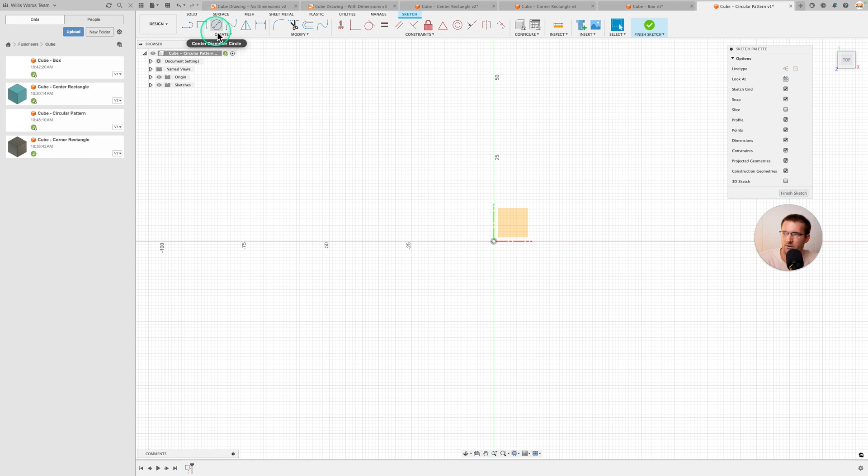The way we would do that, it's the default here. You can also click Create Rectangle, 2-point rectangle. Or what I would recommend is use the R shortcut, so that's what I'm going to do. If you just click R on your keyboard, we can select here, and then we're going to draw it out that way.

So if you're trying to make 1/4 of a cube, you basically want both of these to be a half of a cube, right? And our dimensions for this cube are 1 inch by 1 inch by 1 inch, or 25.4 millimeters cubed.

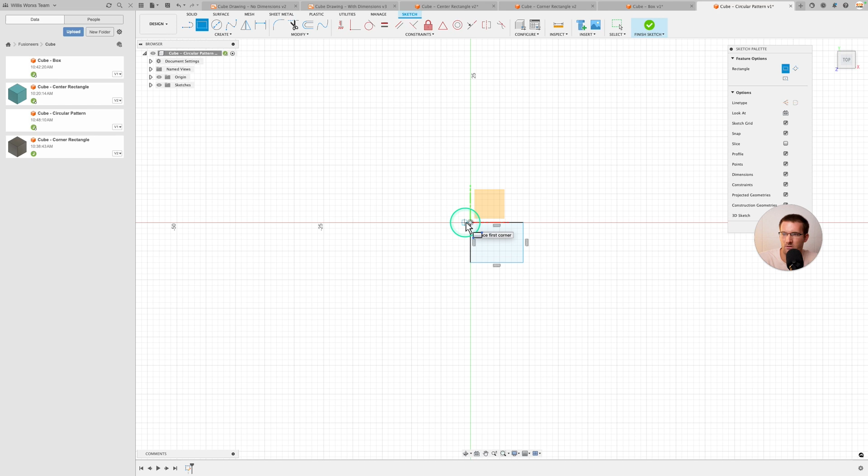So what we're going to do is click Dimension. I'm going to click here, and then I'm going to say 25.4 divided by 2. And then we can do the same thing for this side, 25.4 divided by 2.

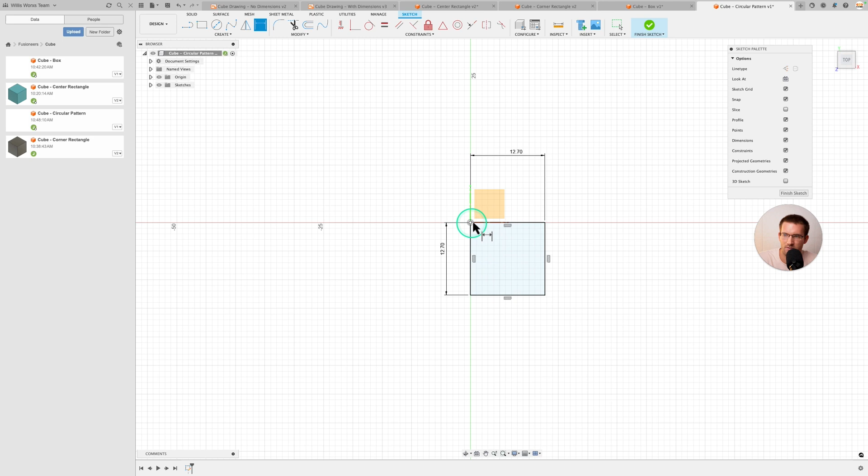And if your rectangle is not black right now, the most likely reason is because you didn't constrain it with the origin. So I'm just going to go back really quickly for those people.

Say I drew my rectangle over here, and then we did the same thing. We said 25.4 divided by 2, and then I'm going to use the shortcut where I say dimension. I'm just going to make this equal to that. So it's the same thing I just did, just a little bit different way.

And you'll see here it's still blue. So if I click Escape, I can move this around. And we want it to be fixed.

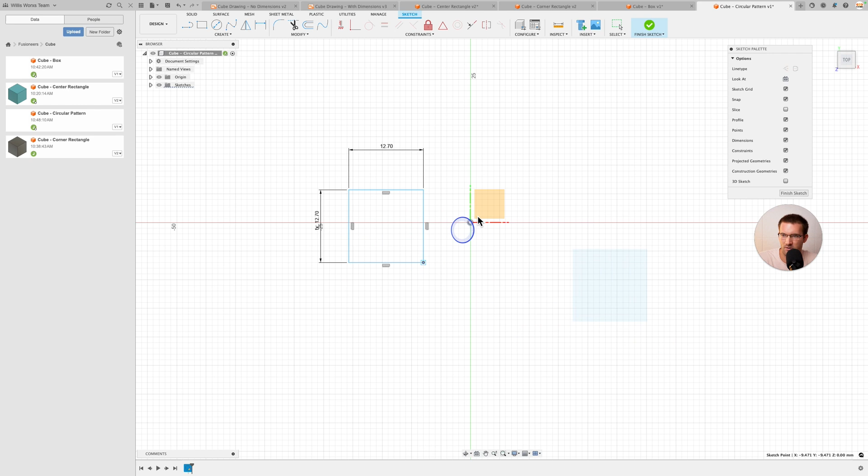So the way you would do that, if you accidentally didn't do it from the beginning, is you click Coincident. You click this little corner here, and you should be able to see that it's on that corner. So you click that, and then we click here. Sometimes you have to click it a couple times for whatever reason. And you'll see here now it's black, it's fully constrained, and that's what we want.

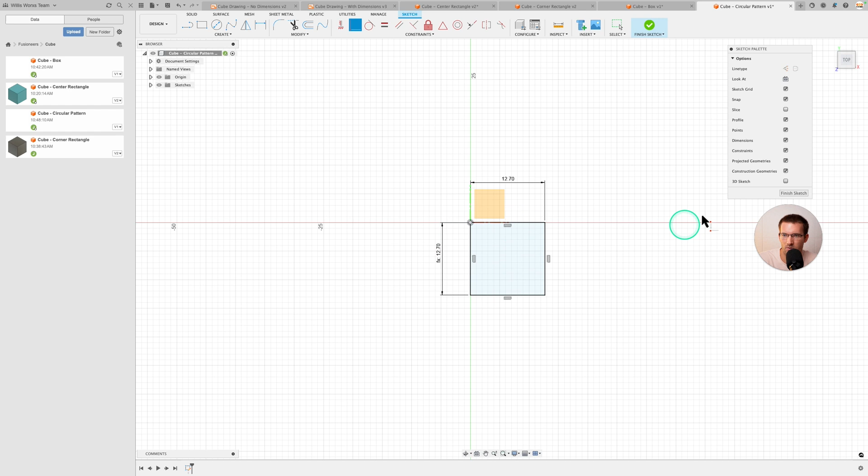So we're going to click Finish Sketch, and now we can go back to the home view, and we see that we've basically made this quadrant of the drawing for the cube.

So now we're going to click E, which is Extrude, and you'll see that it'll automatically snap to that square that we drew. And now we're just going to make it 25.4, so we're going to make it the full height. We're making it 1/4 of the size.

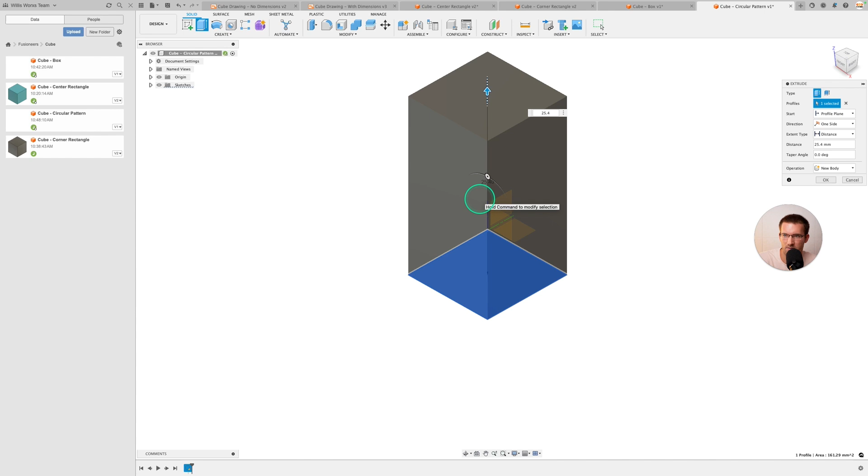So click Enter. And now if we look from the top, what we want to do now is we want to do a circular pattern to make it into a cube.

And so the way we'll do that is click Create, and then we'll go down to Pattern, Circular Pattern. And then we're going to select this body here. And then we want to select the axis as the origin here. And you don't want this axis and you don't want that axis.

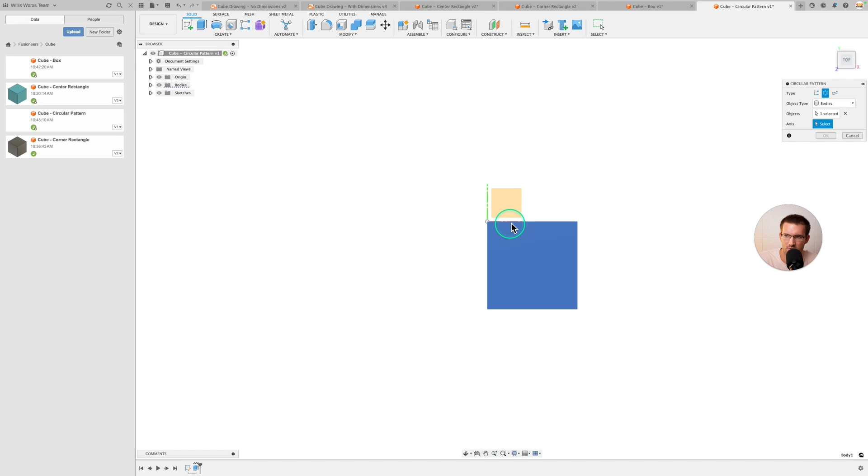So it's probably better to go back to the home view and rotate around to get to this blue here. If you zoom in, you should be able to see there's a blue vertical axis there. Or you can also just select the side here, or this edge here. So if you select that, now we see that it's patterning around that center axis there.

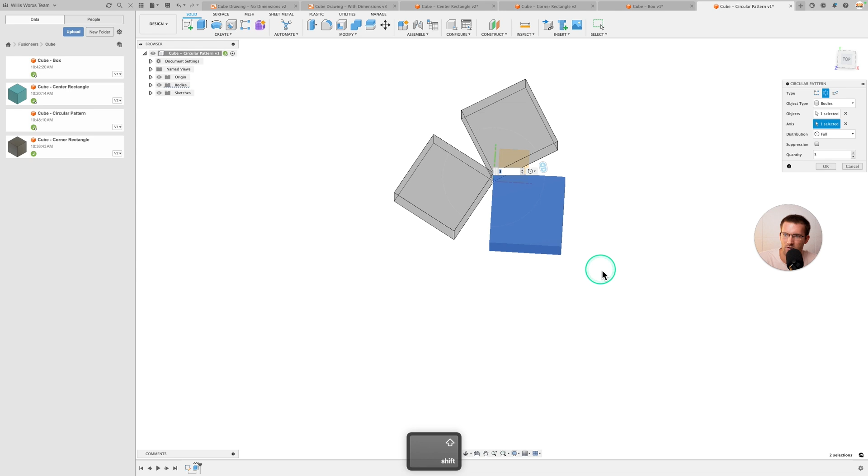And the only issue with this is we only have 3, so we need to change this to 4. And now we have what looks more like a cube.

So as I mentioned, this was just 1 quadrant, and then we make the other 3. Click OK. Alright, so now that we applied the pattern, we have our cube.

The only issue is that if you go into the browser, you can see that we have 4 separate bodies. So when we did that patterning, it didn't combine them. It just made them into separate bodies that are just next to each other.

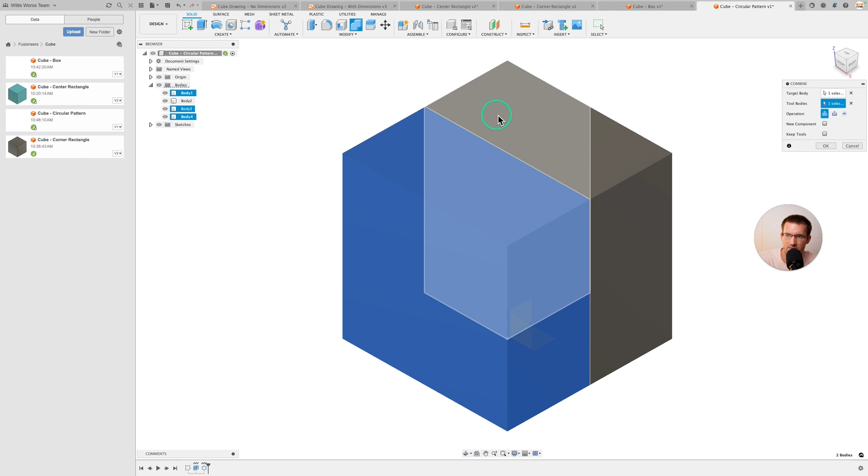So what we want to do is combine. You can pick one of these, it doesn't really matter. That's our target body, which means that's the one that we're joining to. And then our tool bodies are going to be all these other ones. And then we're going to click OK.

You can leave all this as default, and you'll see here the operation that we're using is join. Click OK, and now you see we have just one body.

So again, this is not the best way to make a cube. I think you can probably understand that, but I think it's just a good representation of using a technique that would be useful in other situations.

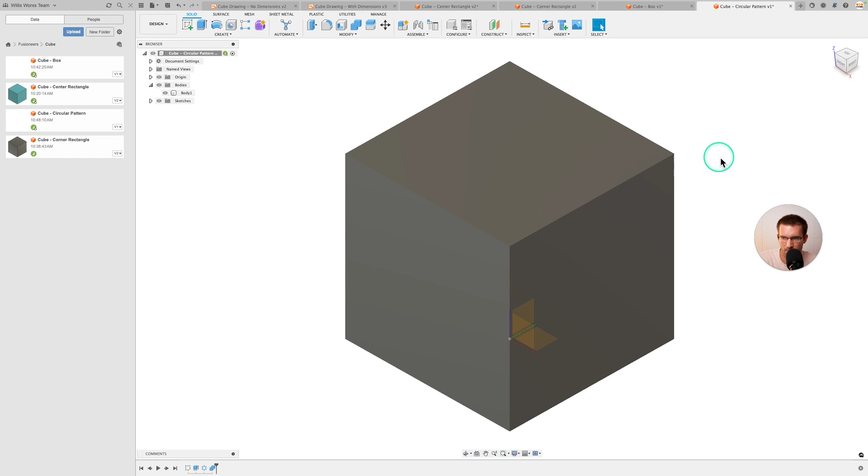So for example, you have a square table, but you want to put 4 legs on it. You could make 1 leg over here, and then you could pattern it kind of like we did around this origin, and we could have all 4 legs on the table. So that's just an example of one way that you might use circular pattern. Don't think of it as just for circles, is what I'm trying to say.

You can use it for squares especially. It works pretty well.